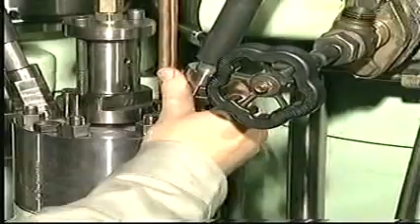Before any dismantling, drain the fuel oil from the fuel oil high pressure pipes. Using a spanner, loosen the coupling pieces fitted on each end of the high pressure pipe.

Remove the high pressure pipe. Take care not to damage the high pressure pipe seatings. Once the fuel oil high pressure pipe has been removed, insert plastic plugs, both to prevent damage and to prevent dirt from entering the orifices.

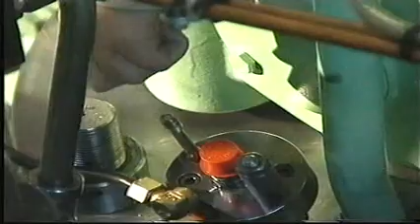Unscrew the fixing nuts and remove the spacers. Remove the fuel valve from the cylinder cover using the lifting tool if the valve sticks.

Thoroughly clean the fuel valve bore in the cylinder cover. Clean off any carbon deposits in the fuel valve bore with a carbon cutter.

If marks are found on the seating in the bore, recondition the seating with a seating face cutter. Grind the seating with a grinding mandrel and a grinding compound, for example carborundum number 200.

After milling and grinding, thoroughly clean the bore and seating and check again that there are no signs of damage on the seating.

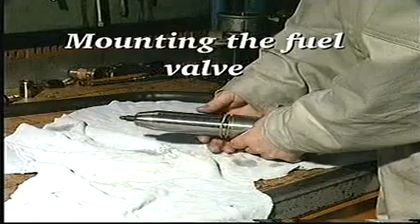After reconditioning the seating in the bore and thoroughly cleaning both bore and seating, fit new O-rings on a new or overhauled fuel valve which has just been pressure tested and lubricate with molybdenum disulfide.

Carefully mount the valve in the cylinder cover. Mount the spacers and nuts.

Adjust the torque spanner to the value indicated in procedure number 901. Tighten the nuts using the torque spanner. Reconnect the return oil pipe to the fuel valve.

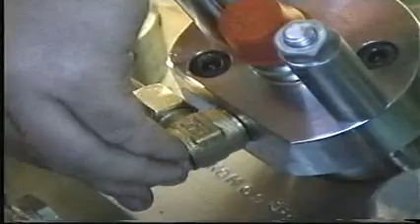Check that there are no marks on the seating surfaces of the fuel oil high pressure pipe. If necessary, recondition the seatings as described in procedure number 909. For the fuel oil high pressure pipes which are provided with a steel armoured protective hose, also check the adjustment of the thrust bushing. See procedure number 909.

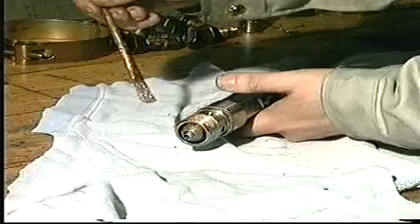Replace the O-rings and coat with molybdenum disulfide. Mount the fuel oil high pressure pipe.

Adjust the torque spanner to the value indicated in procedure number 901. Tighten the coupling pieces using the torque spanner. Turn on the fuel oil supply.

Remove the sealing rings and the plastic plugs. Set up the fuel valve in a bench vise provided with soft jaws. When overhauling fuel valves, handle all parts with the utmost care and keep them completely clean.

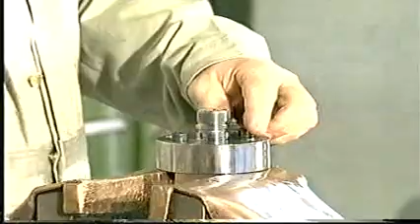Start disassembling the fuel valve by screwing off the two inside hexagon screws. Remove the valve head from the valve housing. Remove the non-return valve and spindle guide from the valve housing.

Remove the sealing rings from the non-return valve and the valve head. Disassemble the non-return valve using the special tool.

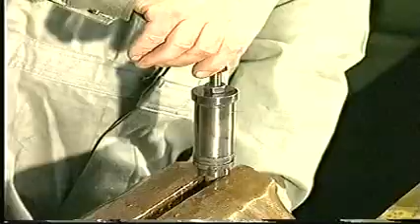Mount the extractor on the non-return valve, taking care not to tighten the screw against the slide inside the non-return valve. Remove the thrust piece.

Clean all parts in gas oil and blow clean with compressed air.

Carefully clean and examine the parts and, if necessary, grind the seating surfaces with a grinding mandrel and carborundum number 500.

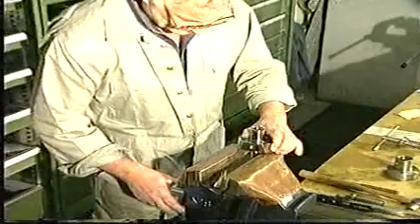Use the milling tool if more serious damage has occurred on the seating surface for the high pressure pipe in the valve head. Use ample amounts of cutting emulsion.

The diameter of the seating surface must not exceed the value stated in procedure number 909 in volume 2 of the instruction book. After grinding and milling, clean the parts in gas oil and blow clean with compressed air.

Use the special drills to clean off any carbon deposits in the central bore of the fuel valve nozzle or in the spray holes. Test the spray holes with a test pin.

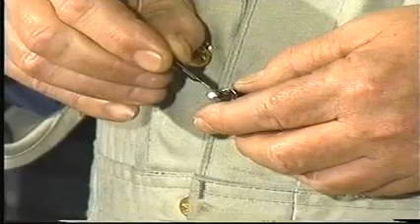If the test pin can be inserted into just one of the holes, or if the holes have become oval, the fuel nozzle must be discarded.

Examine all seating surfaces of the non-return valve and spindle guide through a magnifying glass with an 8 to 10 times magnification. If there are pressing-in marks or the like on the seats, mount a new non-return valve or a new spindle guide. Lapping of the internal seatings is not acceptable.

Defective parts, with the exception of the two springs, cannot be replaced individually. Remove any deposits on the sliding surfaces with a grade 360 emery cloth and oil.

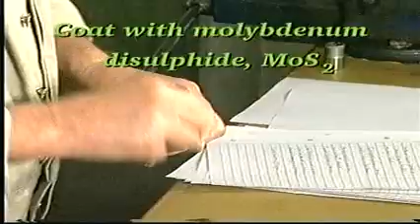Lubricate all movable parts with molybdenum disulfide. Loosely assemble the parts of the non-return valve and then press them firmly together by gently tapping them with a nylon hammer. Mount a new sealing ring on the non-return valve.

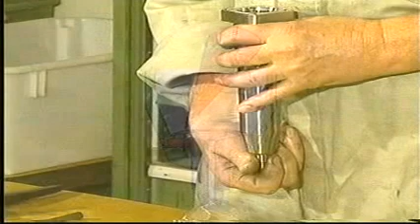Mount the special tool and assemble the non-return valve and spindle guide. Mount the fuel nozzle in the valve housing, making sure that it engages correctly with the guide pin. Mount the non-return valve and spindle guide assembly in the valve housing.

Mount new sealing rings in the valve head. Mount the valve head, ensuring that the guide pin between the valve housing and valve head is correctly engaged so that it will prevent the parts from turning in relation to each other. Adjust the torque spanner to the value indicated in procedure 909 in volume 2 of the instruction book.

Tighten the screws using the torque spanner. Overhauled fuel valves or fuel valves taken from stock must be function tested before they are mounted in the cylinder cover.

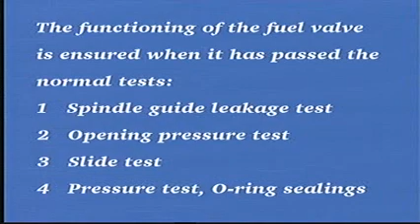Position the fuel valve in the test rig. Adjust the torque spanner to the value indicated in procedure number 901. Tighten the nuts using the torque spanner. Mount the valve with actuator handle.

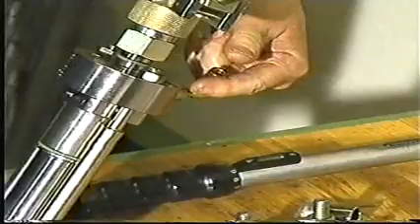Adjust the torque spanner to the value indicated in procedure number 901. Tighten the valve with actuator handle using the torque spanner. Connect the pressure testing pump and the return oil pipe to the fuel valve. For guidance on how to operate the pressure testing pump, refer to the supplier's special instruction.

Slowly fill the valve by pumping at low pressure until oil, without air bubbles, flows from the return oil pipe. Raise the pressure until it is above the opening pressure.

Flush the valve for about 5 seconds.

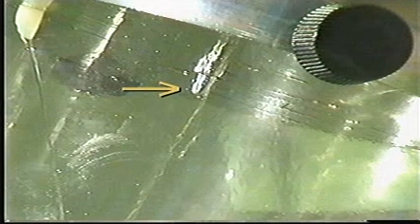There will always be a certain amount of oil flowing from the return oil pipe when the fuel valve is full of oil and pressurized. Oil must not seep from the fuel valve nozzle holes until reaching a pressure of 50 bar below the specified opening pressure. If oil does seep from the fuel valve nozzles, see Procedure number 909.

Slowly increase the pressure until oil is emitted from all the atomizer holes. Read the actual opening pressure on the pressure gauge marked working pressure. If the actual opening pressure differs from the specified opening pressure, remove discs or insert additional discs under any existing discs,

or replace the spring. The sum of the pressure markings on the extra discs must not exceed 150 bar. The fuel valve must be retested after any adjustment.

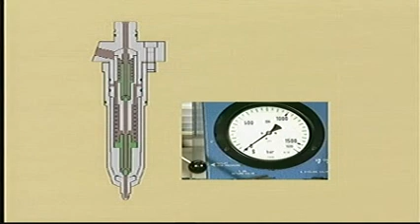If the quick pressure drop cannot be registered, the slide is sticking, or the hole is blocked, disassemble and examine the parts, replace if necessary.

Slowly fill the valve by pumping at low pressure until oil, without air bubbles, flows from the return oil pipe. Remove the return oil pipe and block the outlet hole with a gasket and a plug screw.

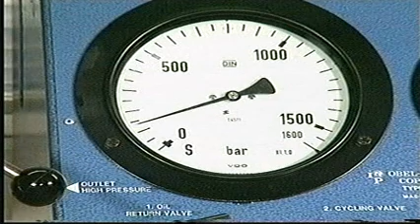Increase the pressure to about 100 bar and stop the pump. The pressure should now remain at 100 bar. If oil leaks between the valve head and the valve housing, the O-ring seal on the valve head is defective

and must be replaced. If oil leaks from around the fuel valve nozzle or nozzle guide pin, the O-ring seal on the non-return valve is defective and must be replaced. After the fuel valve has passed all the tests, it can be mounted in the cylinder cover.

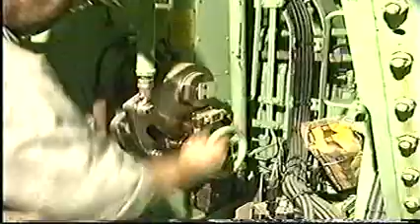The throttle non-return valve must be fully open before adjusting the VIT system. Loosen the lock nut and screw the spindle counterclockwise as far as it will go.

Make sure that the pressurized air reaches the VIT actuator. It may be necessary to switch the changeover valve manually. The pilot valve must be adjusted so that when the spindle is pressed 8 mm inwards, the control air pressure will be 5.5 bar.

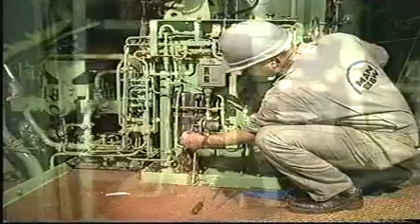Turn the regulating hand wheel so that the steel bar just touches the pilot valve. Insert a distance piece with a thickness of precisely 8 mm.

If the control air pressure deviates from 5.5 bar, loosen the lock screw and turn the spring retainer cap of the pilot valve until the pressure, which can be read on the pressure gauge on the engine side control console, reads 5.5 bar.

Note that it will not be possible to obtain the correct pressure if the throttle non-return valve is not fully open.

Screw the spindle clockwise until a pressure drop can just be registered. Screw the spindle counterclockwise 1 revolution and lock it in this position with a lock nut. This position prevents a sudden increase in VIT index and thereby a sudden increase in the maximum combustion pressure.

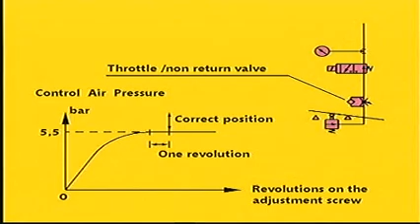Make sure that the VIT index is set at 0. Measure distance R between the two pivoting points.

Note down the result. Measure distance L between the pivoting point and the center line of the VIT rack.

Note down the result. Measure distance X between the pivoting point and the center line of the VIT rack.

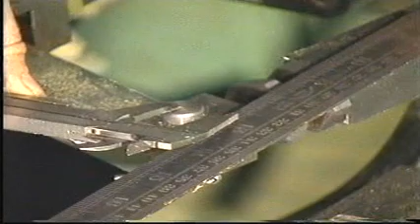Note down the result. To ensure that the movement of the link is evenly distributed around the center line of the VIT rack, R must equal L plus X. In the event that R does not equal L plus X, displace the lever until new measurements confirm that R equals L plus X.

When the correct position is obtained, mark the position of the lever and stamp the cylinder number on the locking plate and lever.

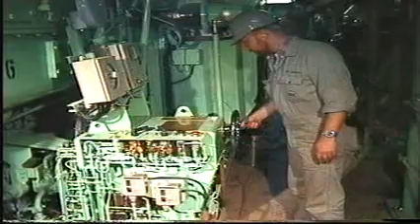Turn the regulating hand wheel until the pressure on the pressure gauge reads 2.75 bar. The VIT rack must be adjusted so that the middle index of the VIT rack can be read when a control air pressure of 2.75 bar is applied. If the actual VIT index does not correspond to the middle index, adjust the link until it does.

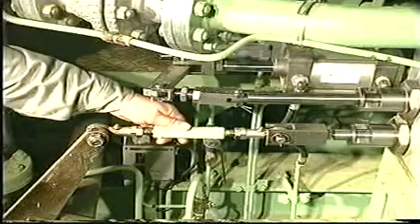Start the engine and run it up to a load corresponding to the breakpoint load. Use the indicator drive or PMI system to adjust the load until it corresponds to the breakpoint load. The mean indicated pressures of the individual cylinders must not deviate more than 0.5 bar. If the deviation is more than 0.5 bar, adjust the load distribution on the fuel index rack of the individual cylinders. The engine is now running at the breakpoint.

At this load, the steel rod must touch both pivoting points. If the rod does not touch both pivoting points, adjust the rod in accordance with step 2.3 of this film.

Measure the maximum combustion pressures of each cylinder. Adjust the links or disconnect and lock the VIT racks so that the maximum combustion pressures, corrected to ISO ambient conditions, are uniform and have the required values.

Note down the fuel pump indexes and VIT indexes.

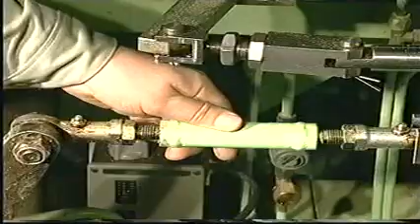Run the engine up until it corresponds to 100% MCR. Use the indicator drive or PMI system to adjust the load so that it corresponds to 100% MCR. The mean indicated pressures of the individual cylinders must not deviate more than 0.5 bar. If the deviation is more than 0.5 bar, adjust the load distribution on the fuel index rack of the individual cylinders.

Again, measure the maximum combustion pressures for each cylinder. Adjust the links or displace and lock the VIT racks so that the maximum combustion pressures, corrected to ISO ambient conditions, are uniform and have the required values.

Note down the fuel pump and VIT indexes.

Note down the VIT indexes at breakpoint and 100% MCR and calculate the average index. Determine the middle value of the VIT rack and calculate the difference between the middle index and the calculated average index. The result of this calculation will determine how much the cams are to be turned.

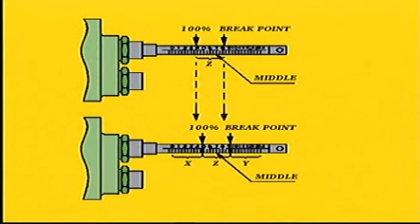If the result exceeds 0.5 millimeters, the cams must be turned according to step 1.6 of this film, after step 1.5 has been completed. The purpose of turning the cams is to distribute the breakpoint and 100% MCR service points evenly around the middle value of the VIT rack.

Note down the VIT indexes at breakpoint and at 100% MCR and calculate the difference. Add half of this difference to the middle value of the VIT rack. Subtract half of this difference from the middle value of the VIT rack.

Calculate the average VIT index at breakpoint and at 100% MCR. Determine the control air pressures corresponding to the average VIT index at breakpoint and at 100% MCR.

Stop the engine before making any adjustments. Make sure that control air is able to pass the changeover valve.

Supply a control air pressure of 7 bar to the pilot valve. If the links were adjusted in step 1.4, then adjust again so that a control air pressure of 2.75 bar corresponds to the middle value of the VIT rack.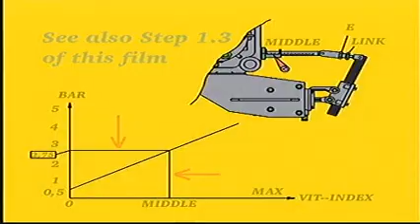Turn the fuel regulating handle to the breakpoint position. At this position, the steel rod touches both pivoting points. Displace the pilot valve bracket until the calculated control air pressure at breakpoint is obtained.

Turn the fuel regulating handle to the 100% MCR position. Displace the lowermost pivoting point until the calculated control air pressure at 100% MCR is obtained.

Start the engine and run it up to a load corresponding to the breakpoint. Make sure that the control air pressure is able to pass the changeover valve. Fine adjust the links so that the maximum combustion pressures, corrected to ISO ambient conditions, are uniform and have the required value.

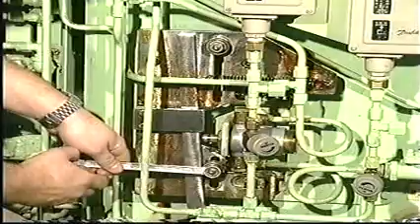Load the engine until it corresponds to 100% MCR and fine adjust the lowermost pivoting point so that the maximum combustion pressures, corrected to ISO...